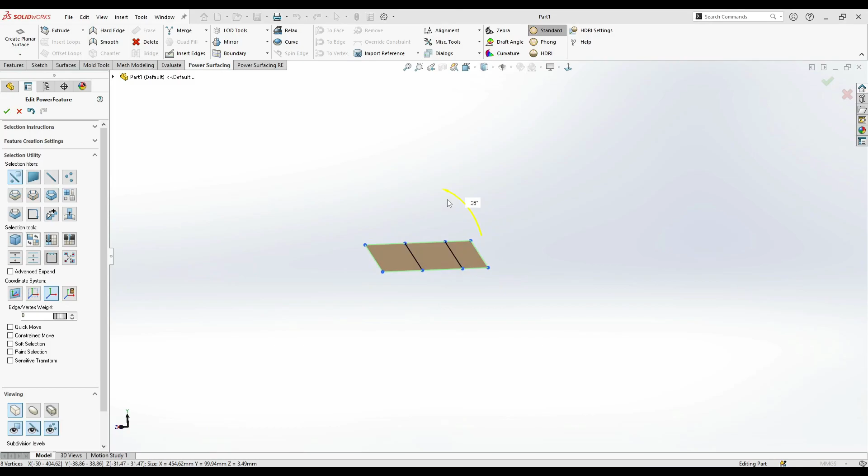Let me show you how. So a couple of extrudes here, and I'm gonna do a mirror. So I just delete this, and I need to mirror from here.

Okay, now I'm just gonna modify this one. So as you see, it's little curvature here, and then it's going until down.

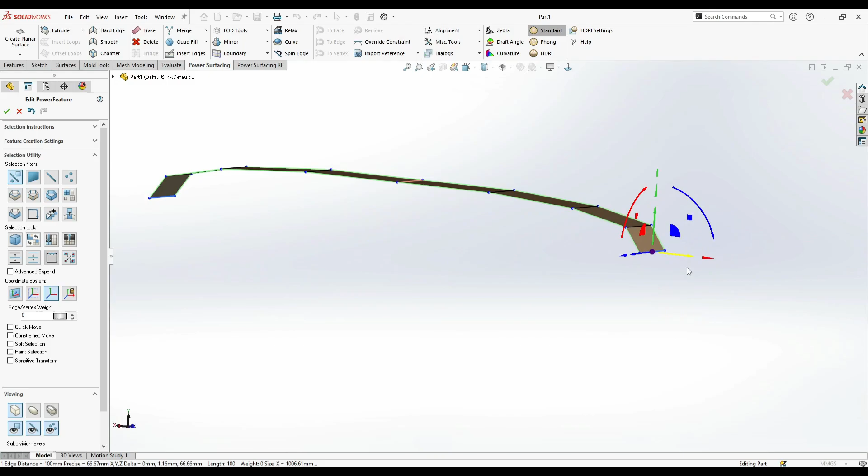And from here it's like that. And from the top, alright, that looks good. That looks great.

Now let's see the rest of it. I'm going to do an extrude from here. Select this top at corners, and let's scale a little inside, a little down, then increase it, maybe 55.

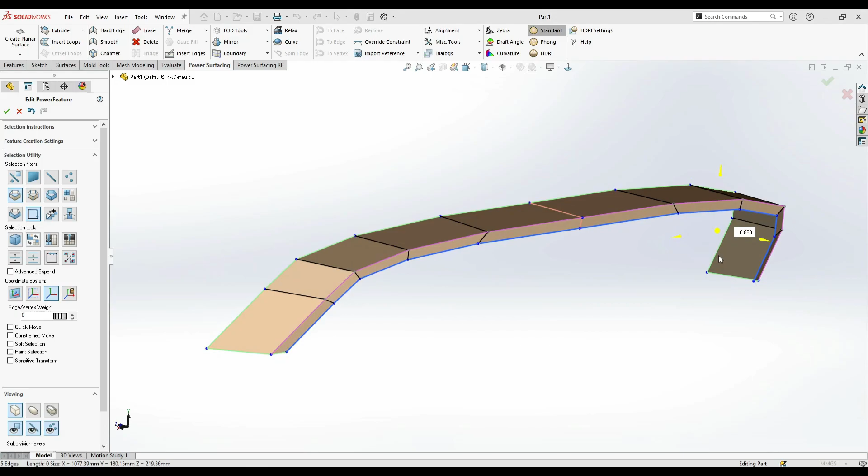And extrude it. Let's take these like that.

Then I'm going to extrude again with the creasing. Crease this about 50 and bevel inside.

And again, let's extrude, scale, move it at here. Now I'm going to adjust this.

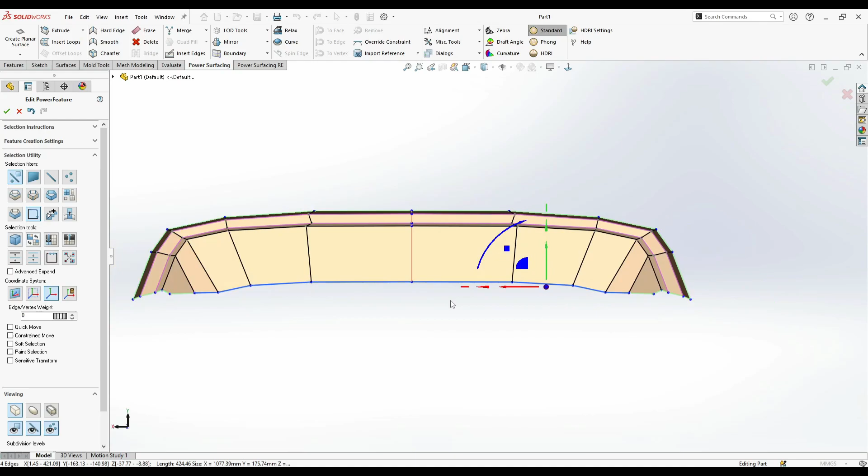Then I can just go ahead and select this arrow here and move it to the ground. So I'm gonna modify it later. Take these, it's from the right side.

And let's move it a little up. So from here, let's cut something like that.

So I'm gonna delete these faces, insert an edge here. You're probably gonna get something like that.

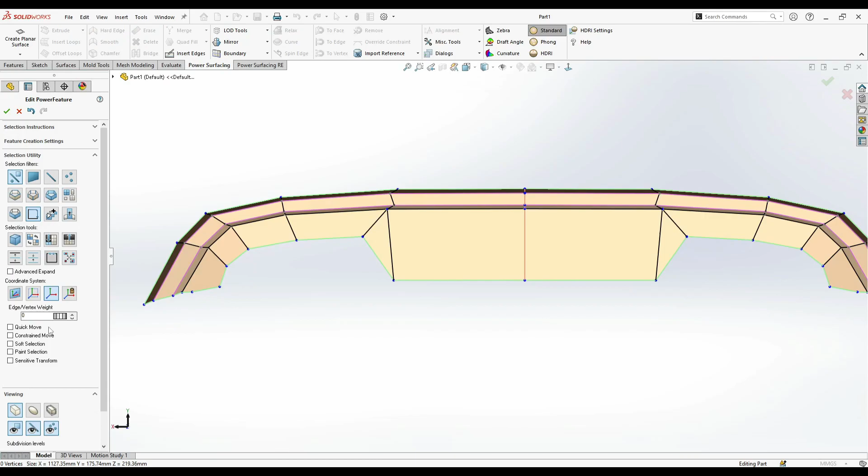Alright, so you just start to get a nice result. Then this should be extruded to inside.

With creasing, maybe 45, and extrude again. Okay, once we just did that, I can select these edges and crease it. So it's giving me sort of hard corner here.

I'm gonna take this face and move it up. You can move it a little.

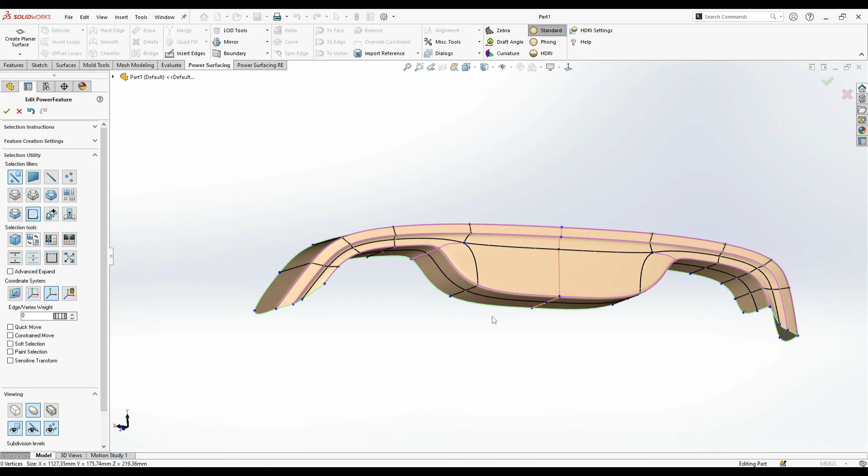Okay, and this one is also creased. Let's insert an edge here and connect it.

And I'm gonna add some more details here. Insert an edge. Let me just modify this one. So I'm gonna put the lines like that.

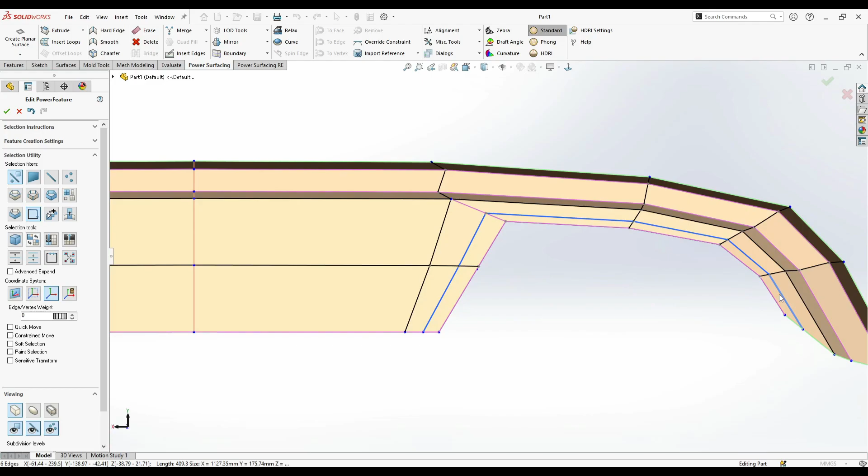And I'm going to select these, crease it, maybe 45, take these and move it here.

Yeah, you should do some more lines here because it's giving a flat look from here. Let me show you like that.

As you've seen, you're gonna notice that it's semi-flat here, it's not really set. So let's go back. I'm gonna select this edge loop here and crease it about 22 or 24.

Take these and move it.

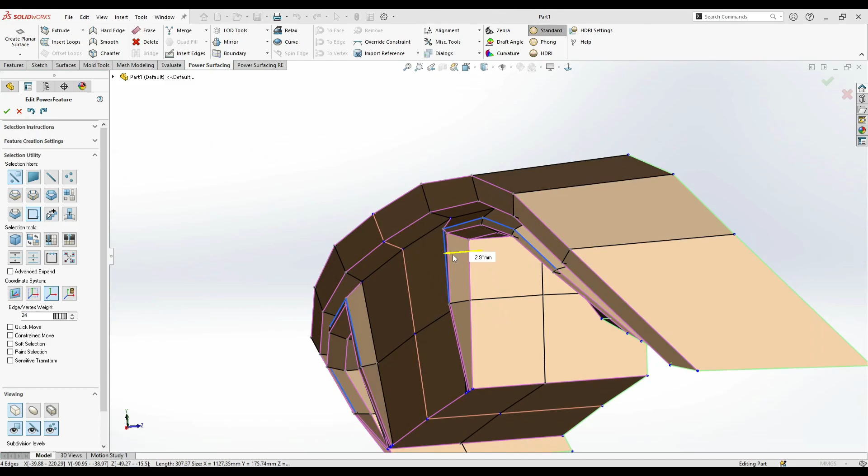And now I'm just going to crease this and move it like that.

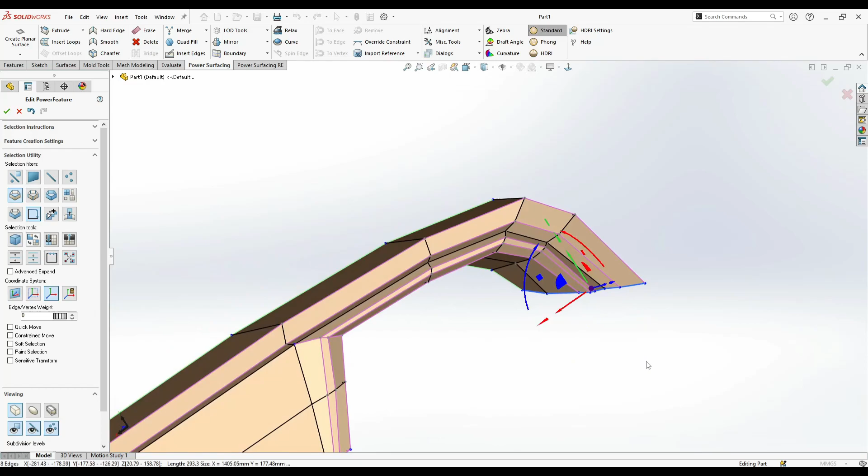I can select a soft selection, just increase it and move it like that, so it gives me this look. Then let's take this edge loop without the soft selection, flat,

and move it until here. And about this one, it's also going to be flat, maybe like that.

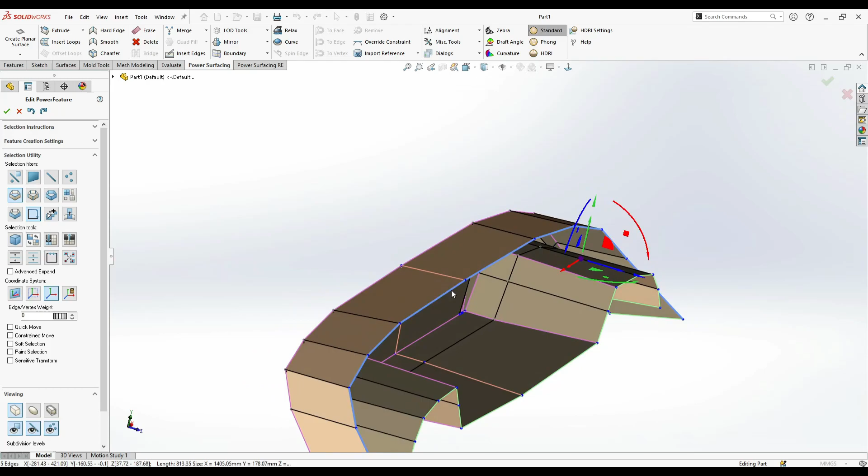Insert an edge here by holding the A key. Okay. Let's hide this, move this like that.

Okay, so now we started to get a nice shape that exactly looks like the picture.

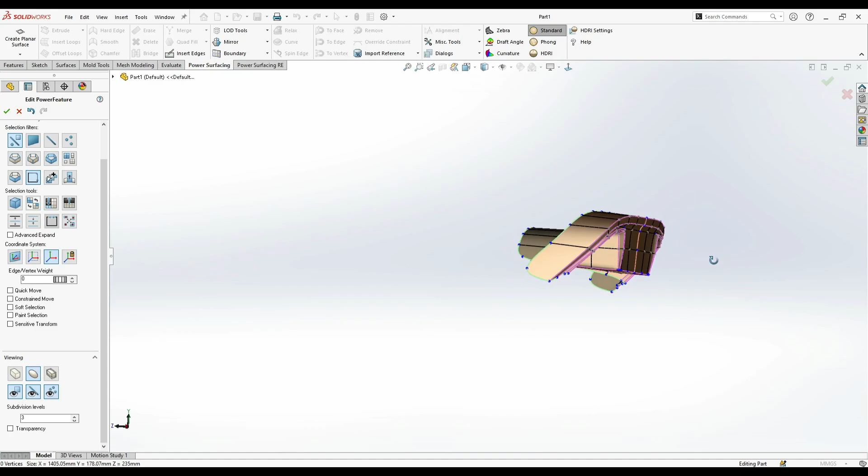We're just going to add a curvature here. Let's connect these vertices like that.

Now I'm going to take this, turn on the soft selection, let's just decrease it, and let's do that.

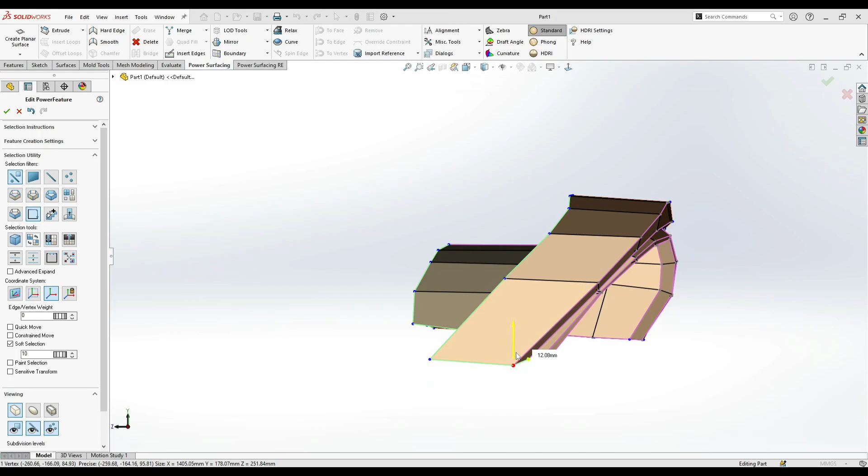Let's remove the soft selection here. Now we got this loop faces. This face here, if we just take it and move it up to here, it's going to give us a great effect. Just decrease this creasing.

I'm going to do a flat. Let's make these flat. This one also. Maybe move a little here.

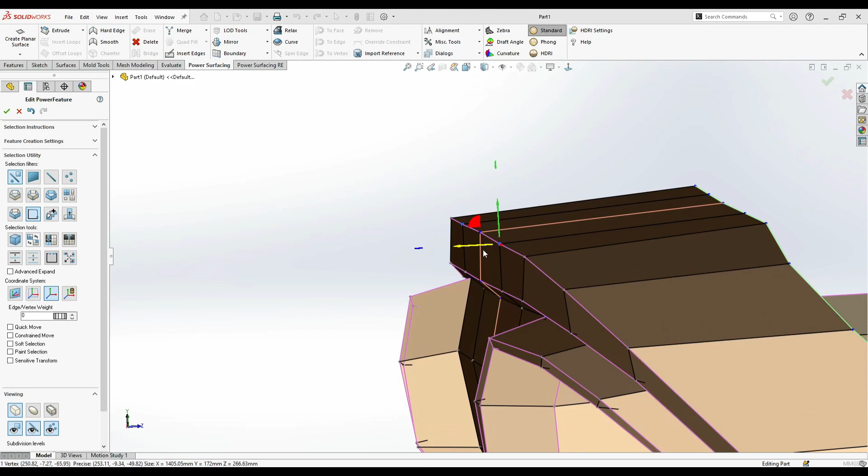I'm going to crease this edge also, give it a little creasing, something like that. Alright, let's see the top. So as you see, we just need to move this on here.

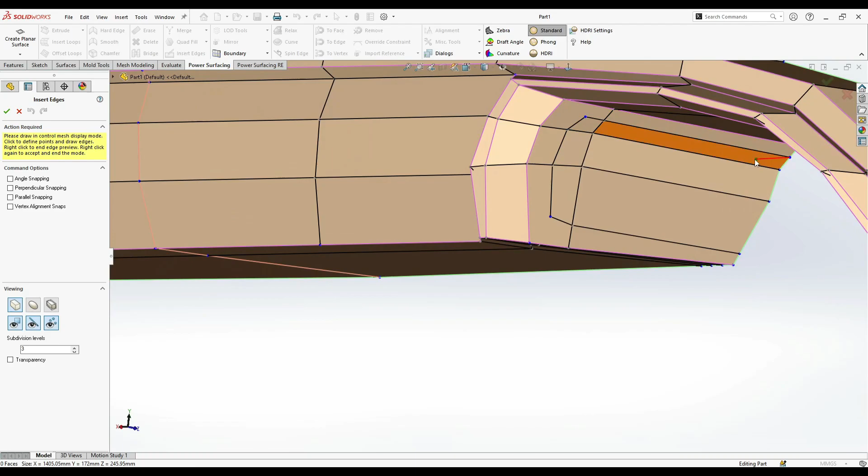And delete this. Insert an edge, connect these. And let's add a crease to just make them all the same here. I'm going to crease this line. So I have here 18 crease. I'm going to do the same on this one. Type 18 and press on this arrow to activate the creasing.

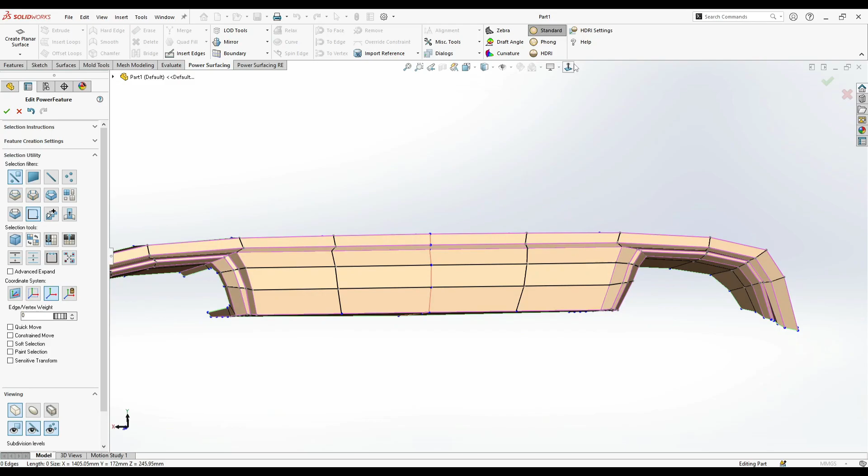So it looks pretty well now. Now let's take that, because this is not creased until the end. Insert the edge. And let's do that.

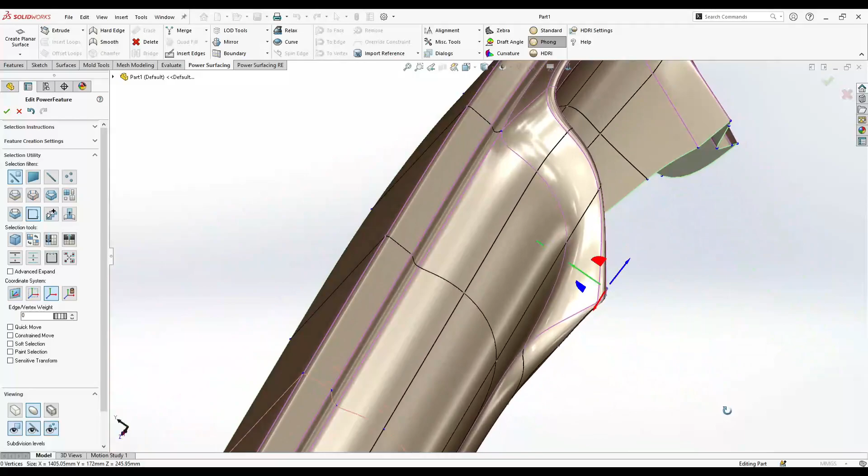Let's fix this topology here. You can choose the constrained move, so it's just move it slightly, cool. Let's modify that. So for this one, I'm just going to remove the creasing for it. So it's going to look like that.

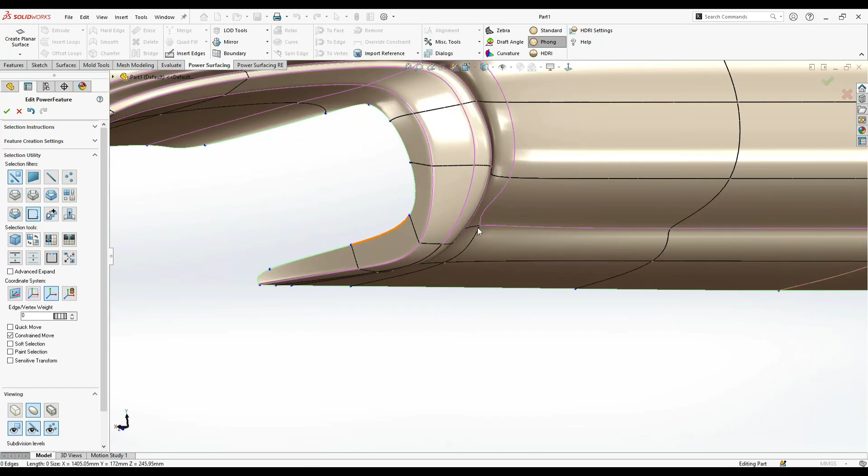And I'm going to connect the crease together to be the same. Here it's 18. Let's make an 18 here. And let's remove this crease. Remove the constrained move, uncheck, and connect. Alright.

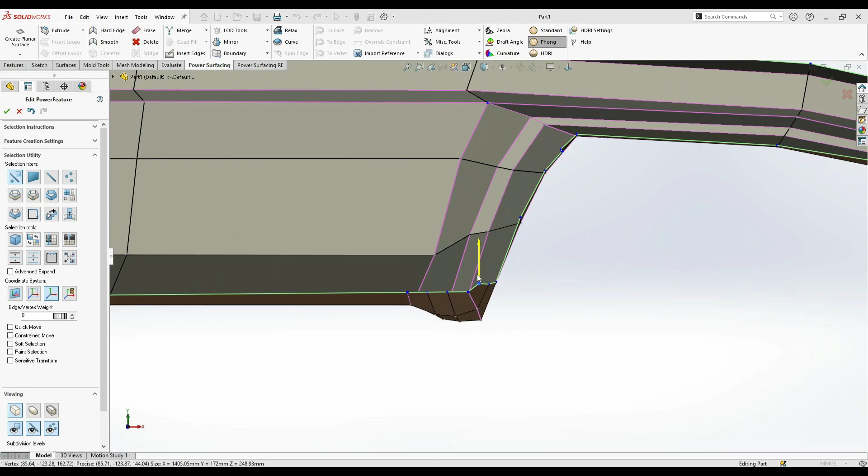So it's pretty cool here. So that front, let's edit some lines. Let's connect it from here. I can take these two vertices and move with the constrained move here, a little, like that. And let's adjust these.

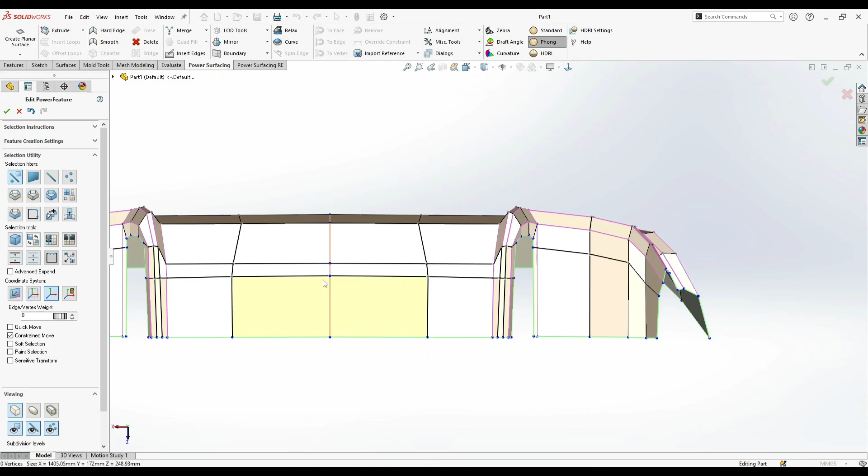If we just can crease this also, maybe 18. Let's move the constraint. Okay, so that's for the first part of the diffuser.

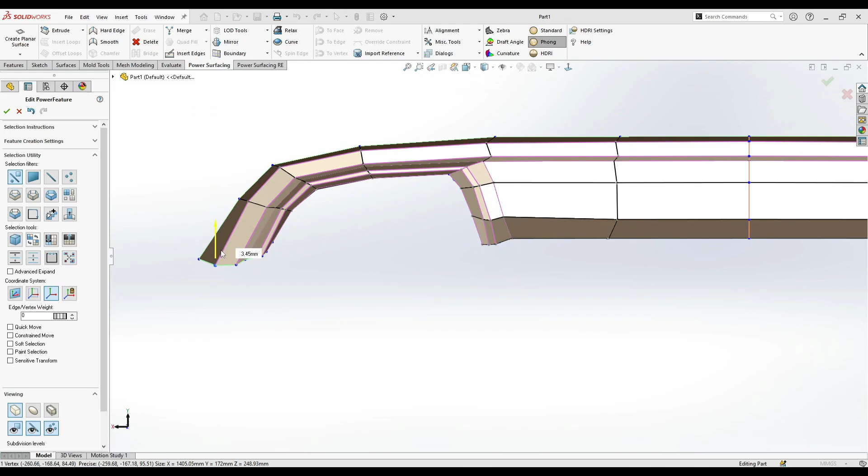Now what I will do is click on convert, and I'm going to create another board with the Power Surfacing. So let's insert a new planar surface. Hit OK and rotate it 90 degrees. So the look should be a little like that.

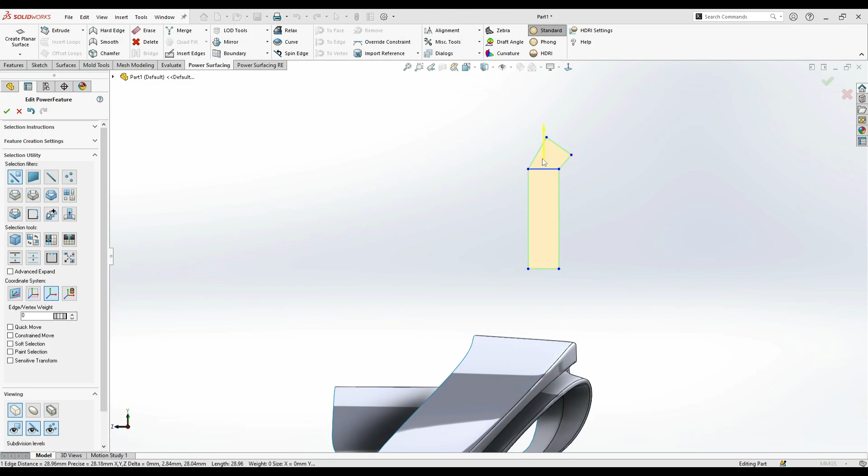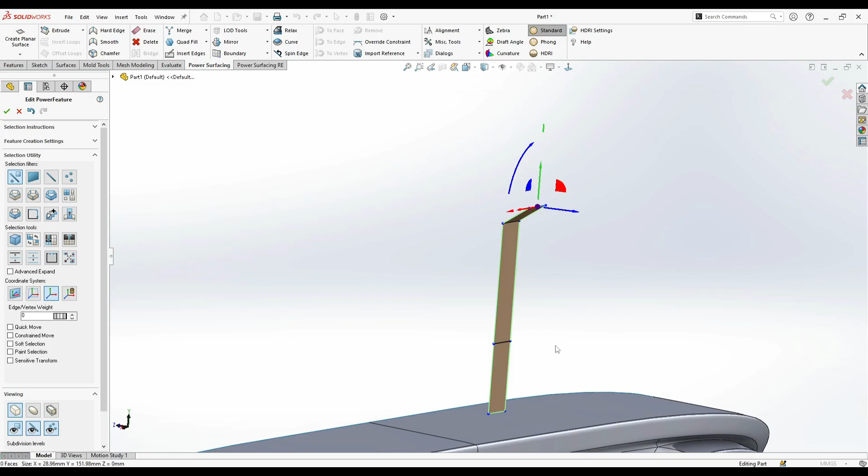Let's extrude this. Or maybe you can just delete these faces and rotate it 90 degrees like that. And now I'm going to select this, do that. And let's just make it a little thinner.

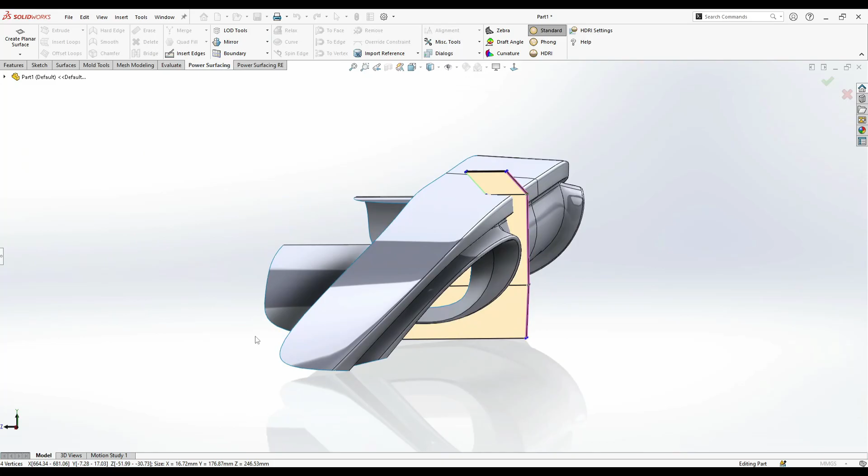From here, select the edge selection, and I can put it here. We do have here about 2 and 2 is 4. And let's just adjust this one. So from the side, it should be a little like that.

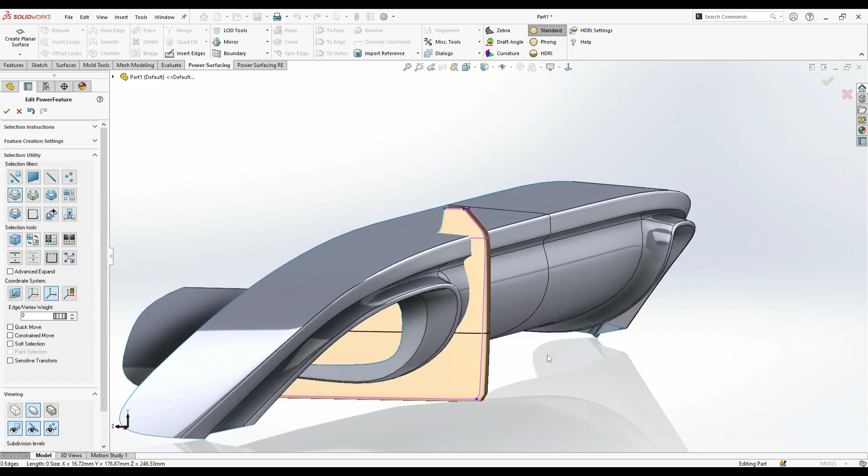So if I just select this sub-d mode, these lines should be creased like that. This edge loop also. We're just going to select this faces, rotate a little.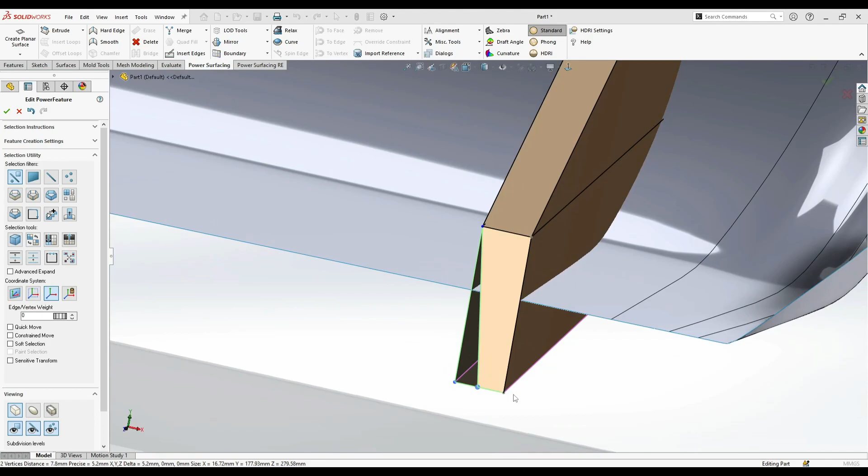And I'm going to close this. So select these lines and hold the A key, extrude and merge. This one was this one, and that was that. Crease these edge loops, like that.

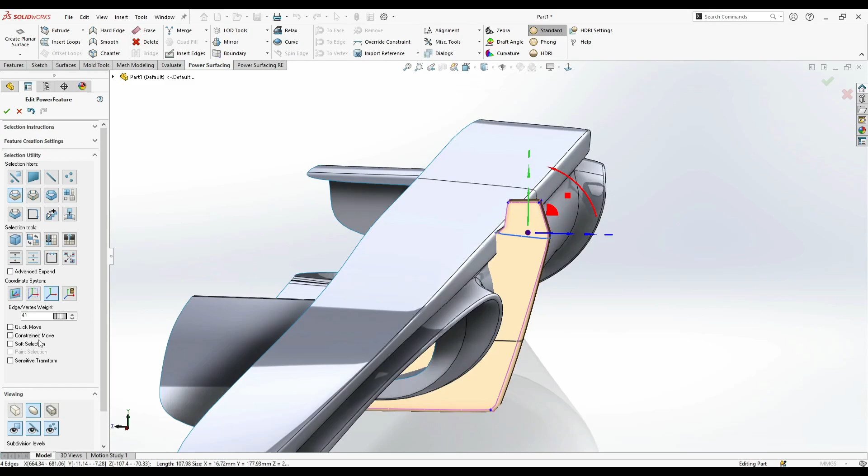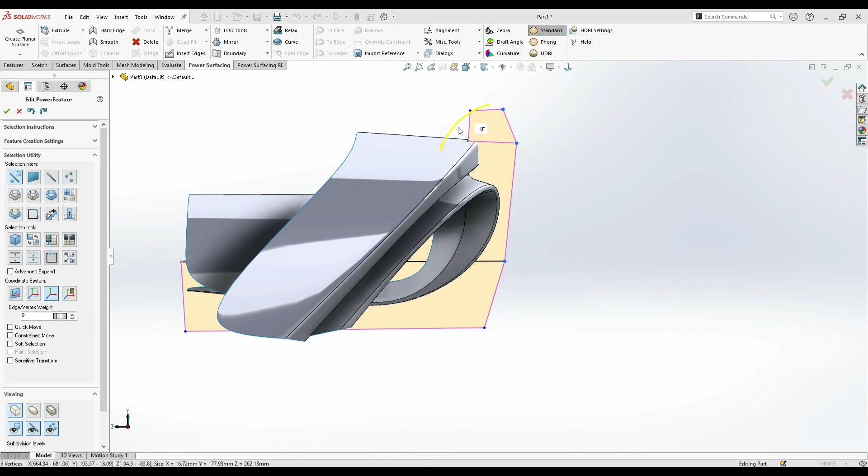I'm going to select the soft selection so I can move it like that. Okay, so this looks good now.

We just need to make these faces flat. Accept that and flatten them. Rotate.

Now once I just finished that, I'm going to select the element and copy, move here. And let's take these two, copy, move here. It should be right here. Maybe if we just take these, let's move this here and this one here.

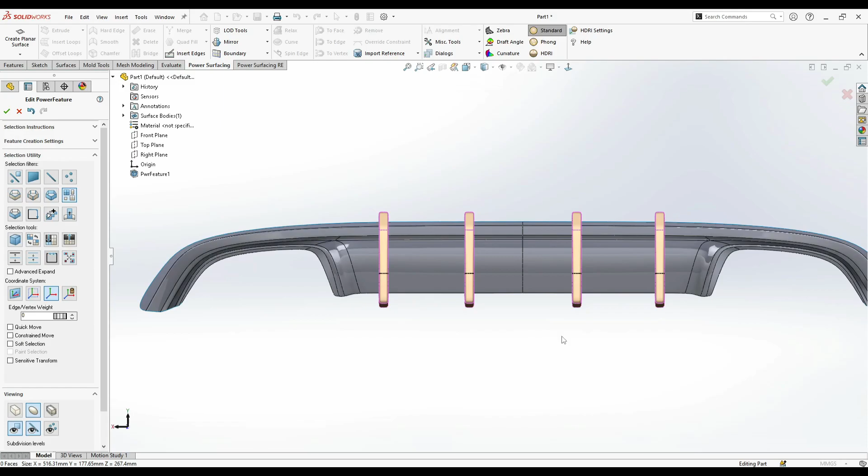Okay, so after I just finished that, let me just crease these edges, maybe 45, and I'm going to convert.

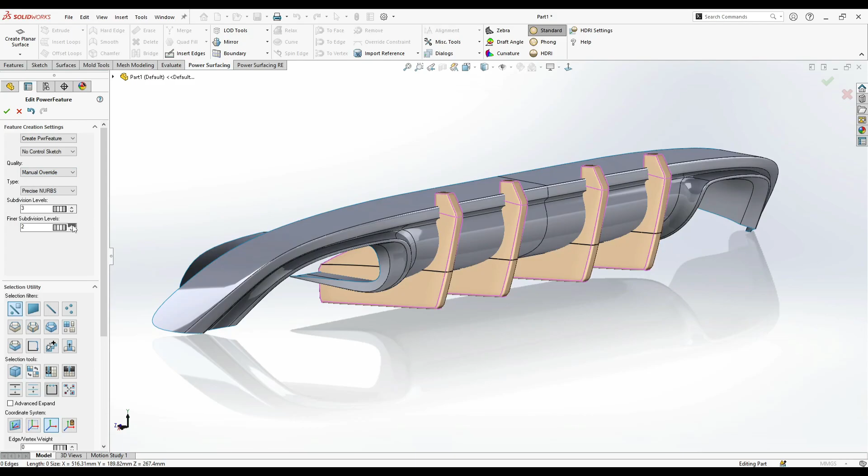Let's go back, features, manual override, let's make quality about 4. Maybe subdivide.

Alright, so that's good. Now I'm going to go back to this board and I need to thicken it. So this should be on the X, it's 1409 millimeters.

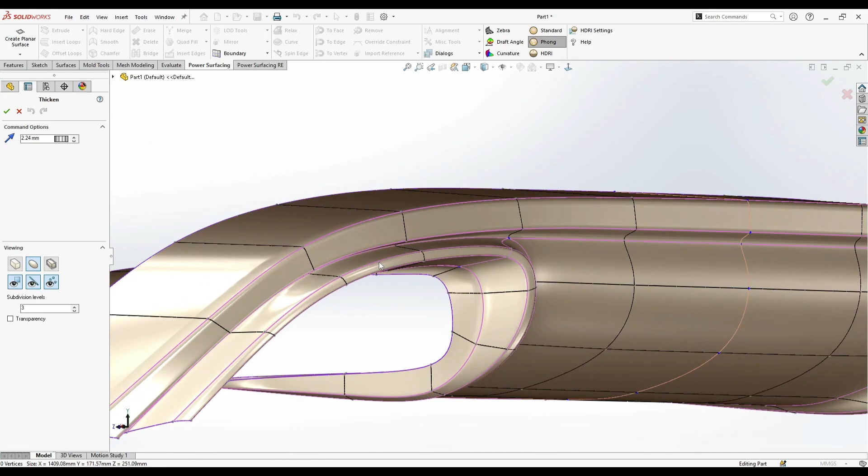So I think we just need to increase it a little more. Maybe 2 millimeters, like that. Let's see how it's going to look. We just need to make it a solid body.

So now I have one surface and it's still not solid. Let's go back, edit, and features, manual override, 3 and 5.

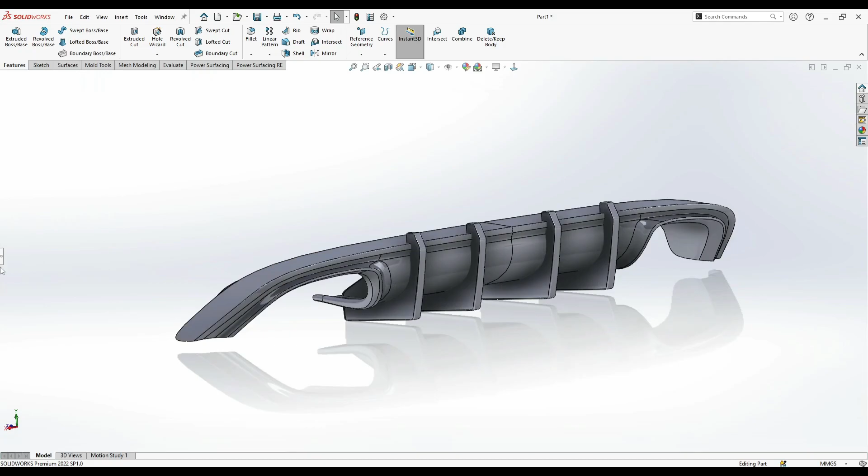So we pretty much now have the ability to combine them. We now have all solid bodies and I can combine. So let's combine all the bodies, hit OK. Now we have combined parts.

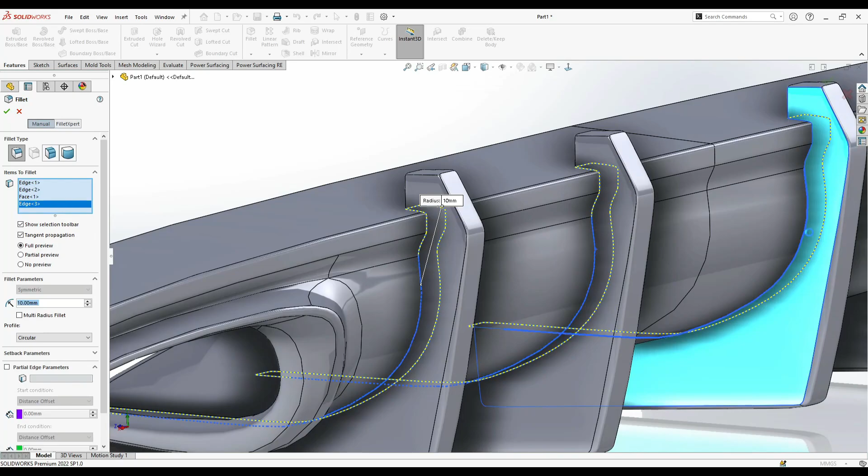Okay, now I can take the fillet and fillet these here. We're going to make a little small fillet here, maybe 1 millimeter, or 2, and hit OK.

Now I need to do an extrude cut, or maybe let's do that. And for the right plane, I'm gonna do extrude cut here. Actually, let's edit the Power Surfacing so it would be better.

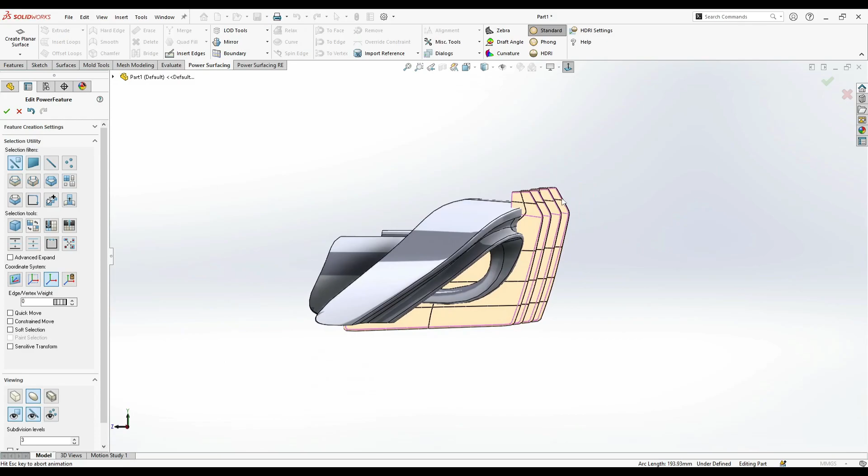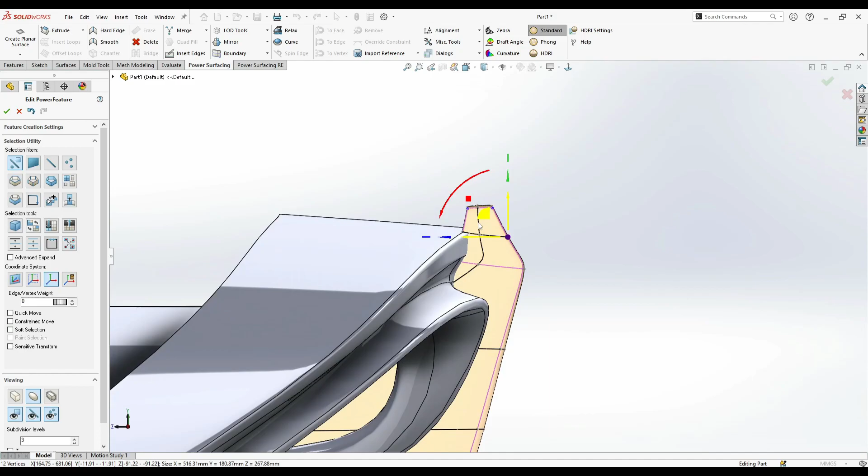We just need to take these, maybe with a soft selection. Now let's remove these and reinsert. Hit OK, and we're done. We just refillet it. This one, and this one, and that one.

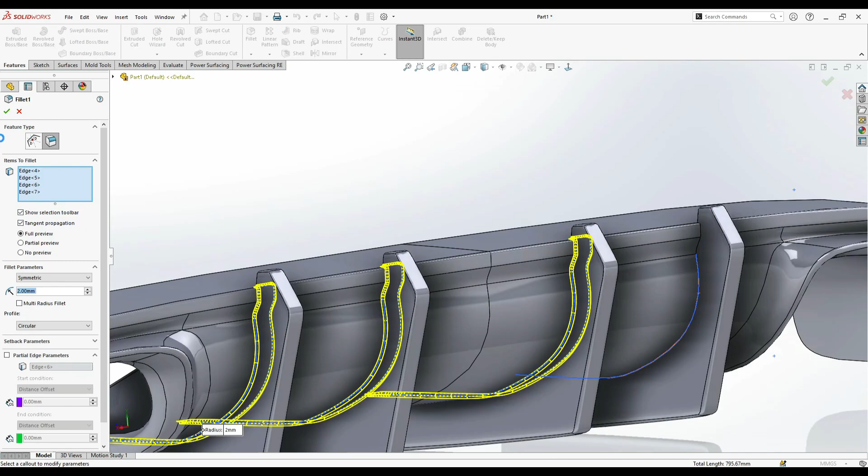Let's add a material. Plastic soft touch, Extrude. We probably have the carbon fiber here. So the full body, and let's adjust the mapping. Something like that.

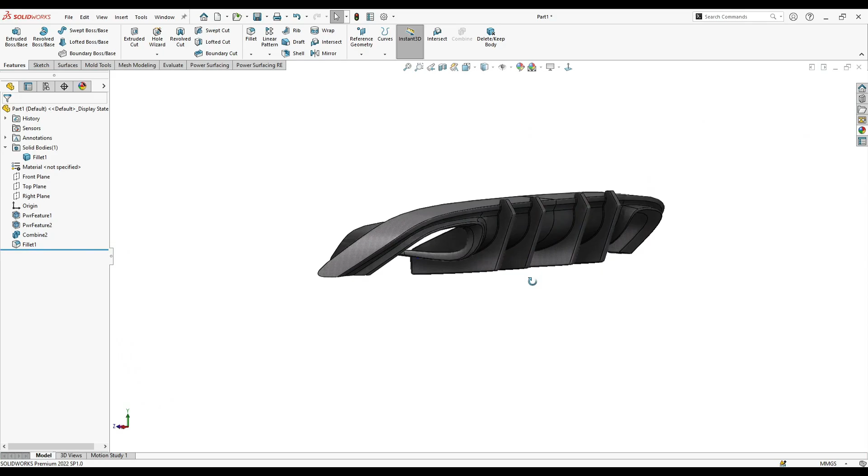Then we go to the next part, and it's to create the Solidworks stuff. From the front plane, here exactly, click OK, and then sketch.

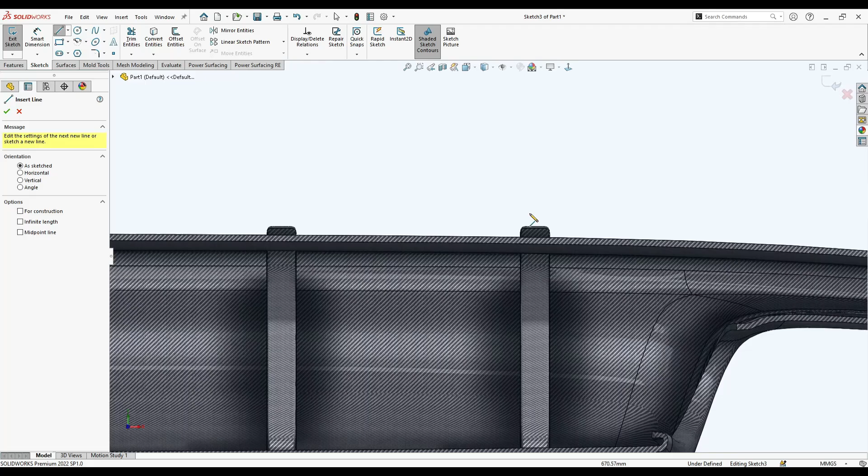Then let's create something like a rectangle. And actually it should be converted to entity and trim.

So let's add a dimension here. Okay, feature extrude, reverse to body. Okay, let's do the offset. Okay.

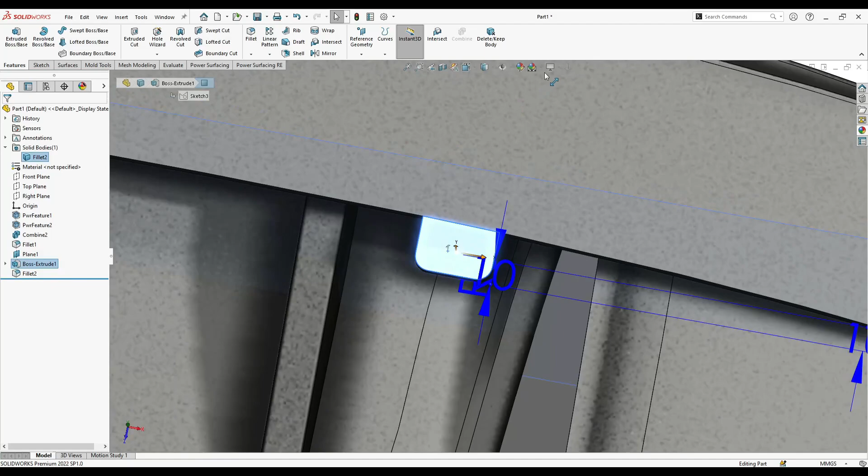Now I'm going to fillet. Six millimeters and sketch from the top plane. I just need to make it bigger.

Now from the top, sketch. Let's offset this one. Reverse 3 millimeters, 5. Okay, 5 is good. Then extrude cut.

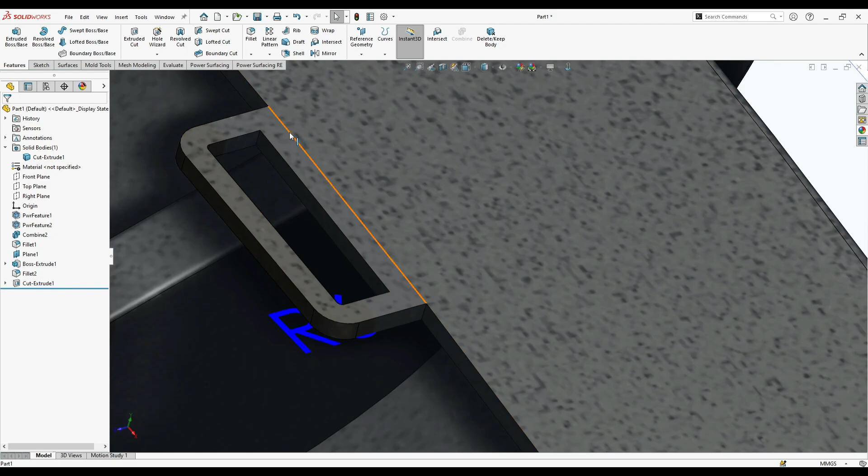I can fillet this here. Maybe 3 millimeters. It's okay.

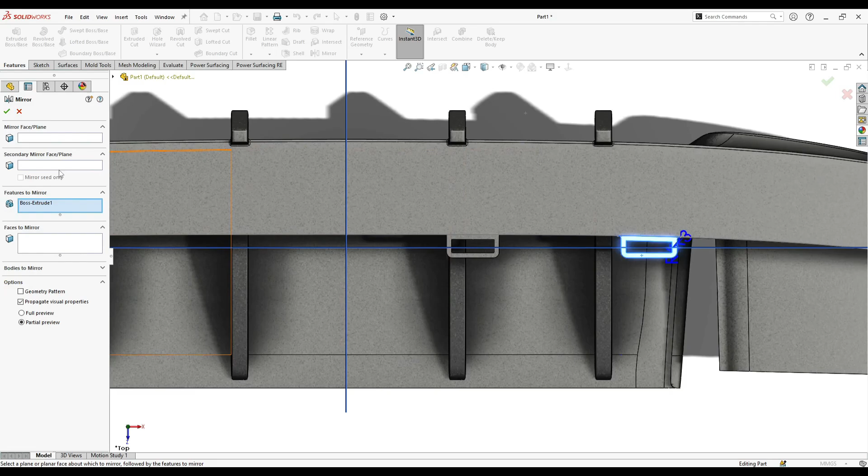Now let's mirror these. Let's create a plane here and mirror. Features this. Mirror plane is this one. And mirror again. The features mirror is the cut extrude and this cut extrude. Okay.

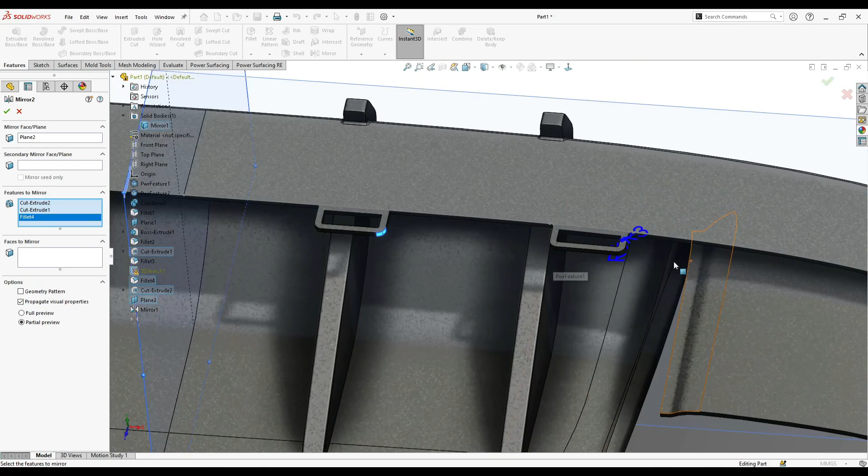And you just forgot to pick the fillets. Okay.

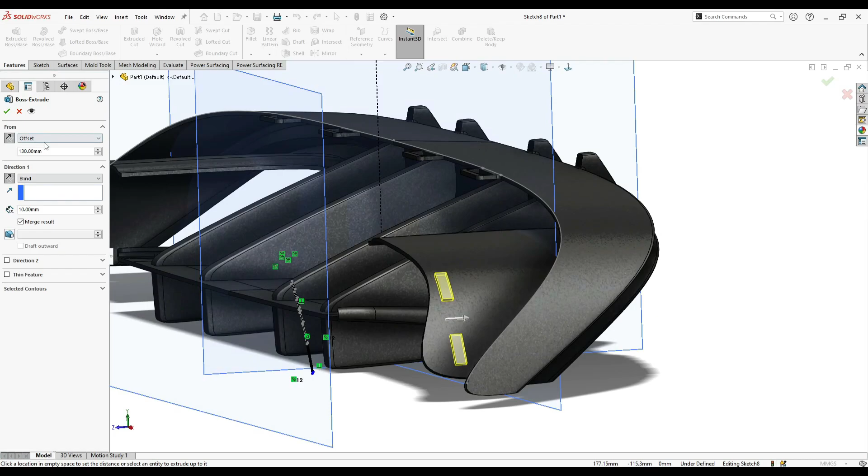Now let's insert a new plane. And sketch. I'm going to convert this to curves, to entity, and I'm going to select. Okay.

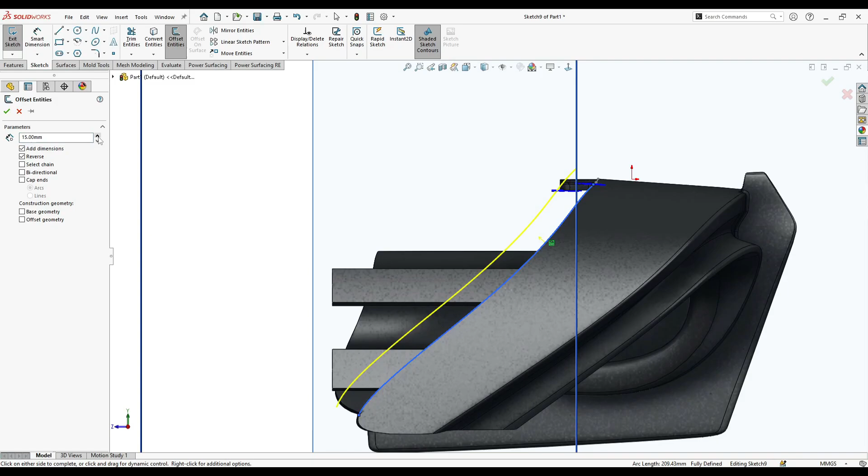Now I'm gonna just, on the right plane, I'm gonna sketch, convert this to entities, and offset. Reverse. Now hit OK.

Now let's trim these unnecessary stuff. You choose extrude cut. It's gonna be blind. Let's offset. And from here until here. Okay.

Now let's fillet. On two sides, like that.

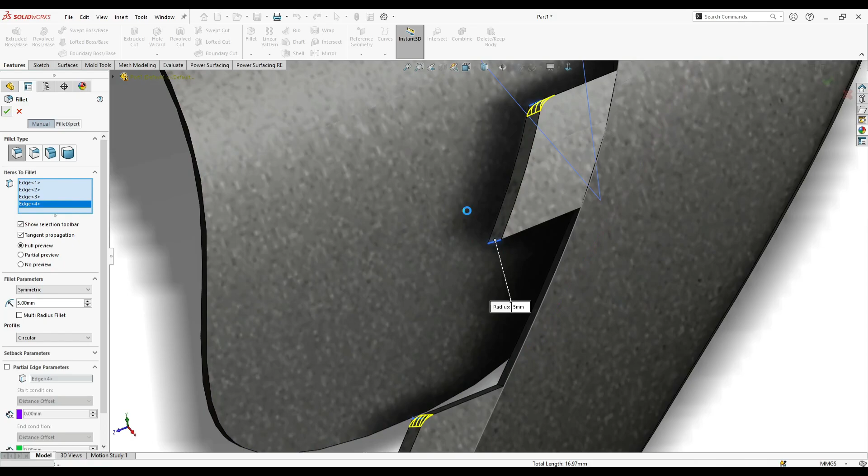And insert a new plane here. Sketch. Let's try if we just offset this one, reverse. Use 3 millimeters. -3. And this one, offset. -3, or reverse. Features extrude cut.

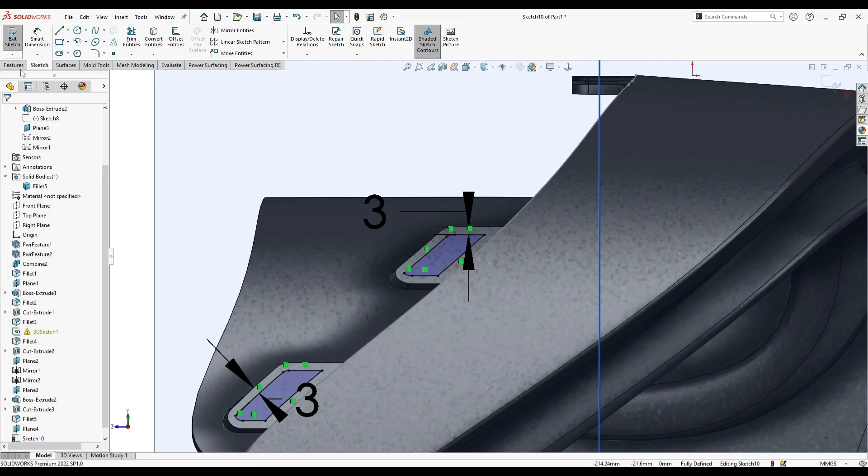Okay, yeah, we just got this one here. I'm just going to try to mirror. Let's hit the mirror button. Select the plane 2. Feature is going to be these. Now you got it on both sides. Let's hide, view, perspective.

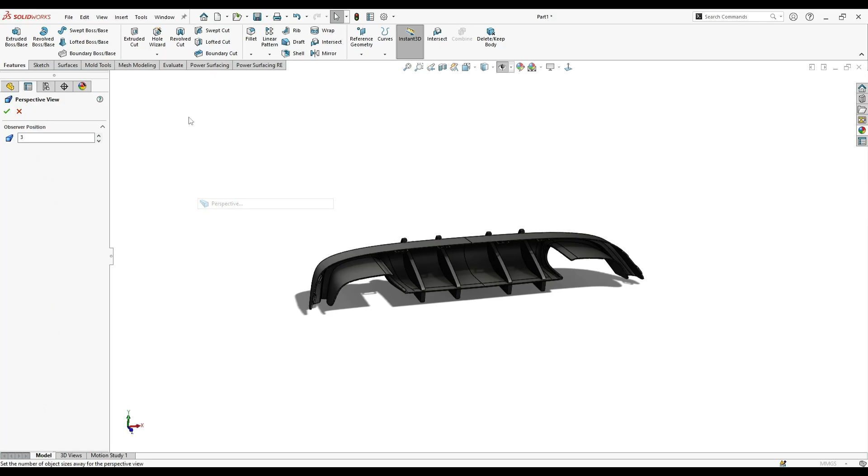Now you got a nice industrial kit for a car. Maybe it's not exactly like it, but it's pretty close to the shape. If you just notice, we just forgot something here.

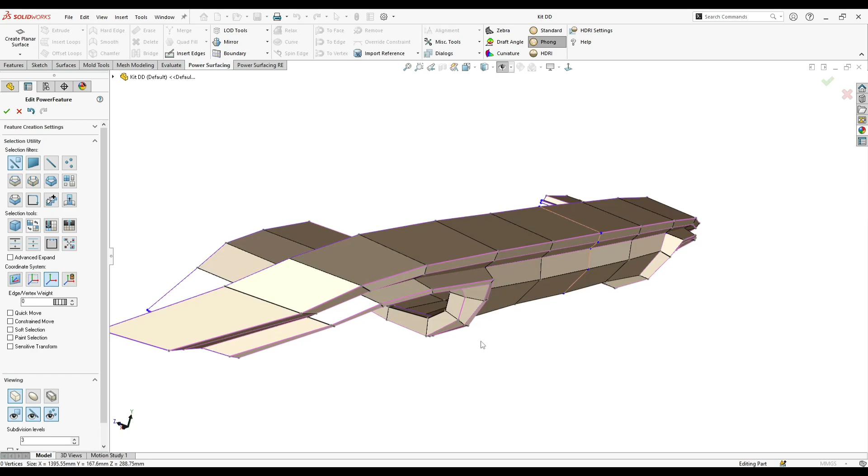For this lamp, I can insert these with the extrude. So if you just go back, let's edit this board. And before we do the thickness, let's just undo. Okay.

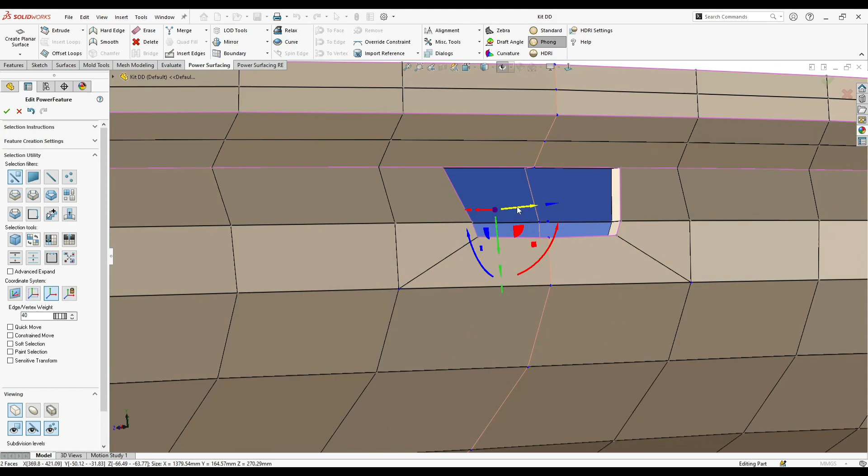Now we can just extrude by subdivide first and insert a small thing here. Insert an edge here and crease this, maybe 40, and extrude, bevel, crease again, and this is like that.

I'm going to crease these corners also. Boom, you got the shape.

This goes just a little here, and the other one like that.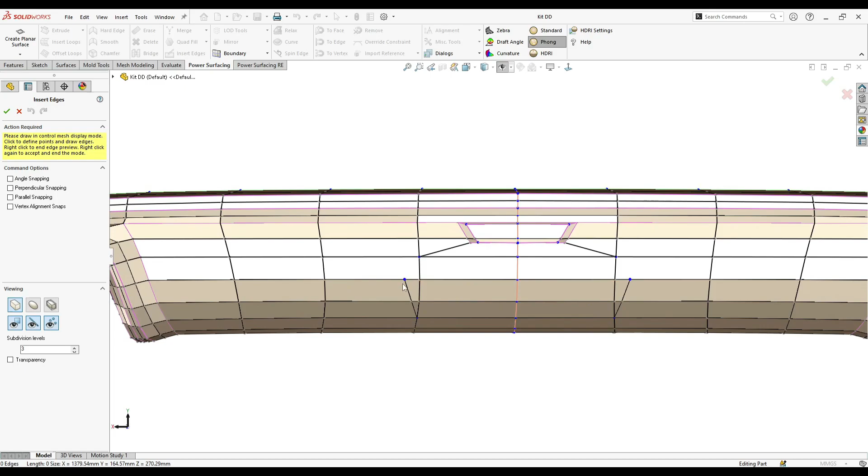Delete this. Crease, extrude bevel.

And I'm going to extrude here and another extrude. Let's merge these entities with each other like that and like that.

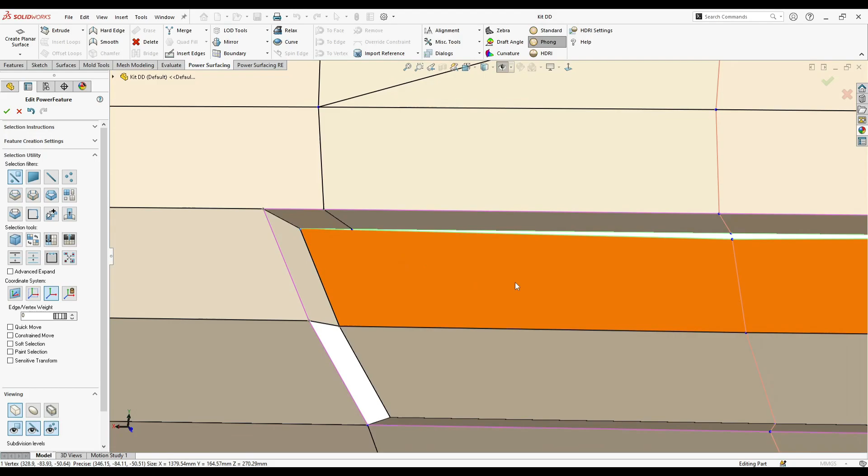Before you just merge this with the center here, insert a new edge here, maybe from here to here, and select both, merge, and this was this one.

Then you can easily remove this and connect them.

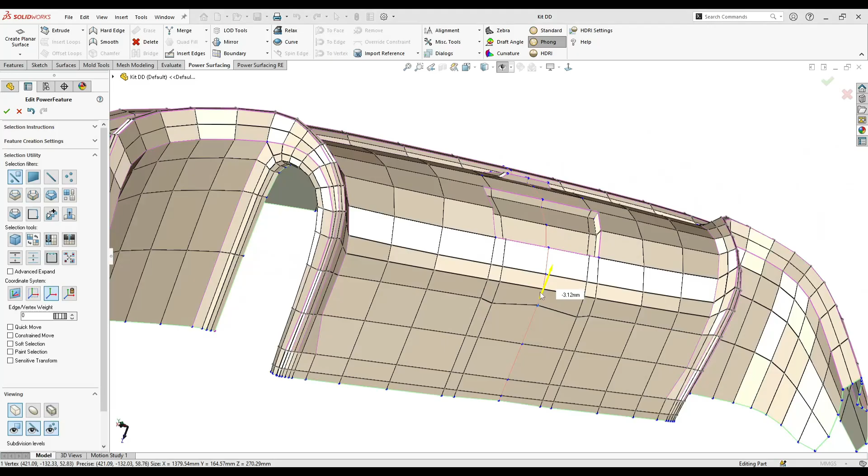Use the constrained move and let's adjust these things here. Okay.

I'm gonna delete some stuff here. Don't actually need it.

And these corners, let's crease them. Take these faces, crease them also. That's it.

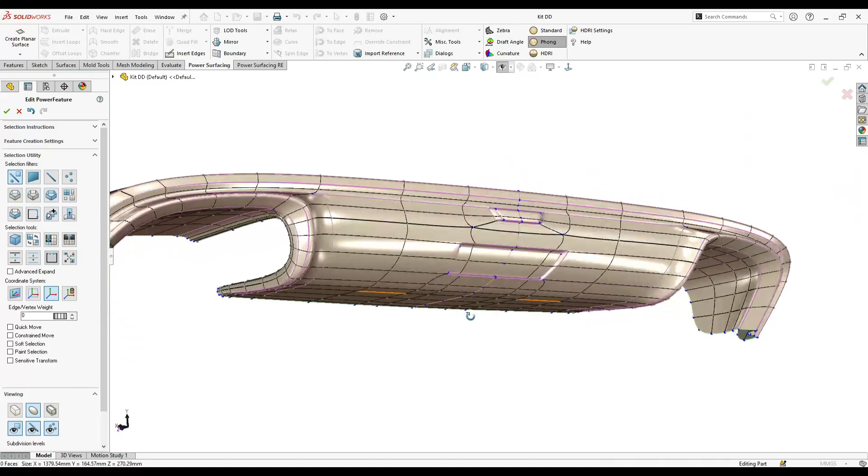However, you just need to just crease this little vertex and it looks better. I think we now don't need this anymore.